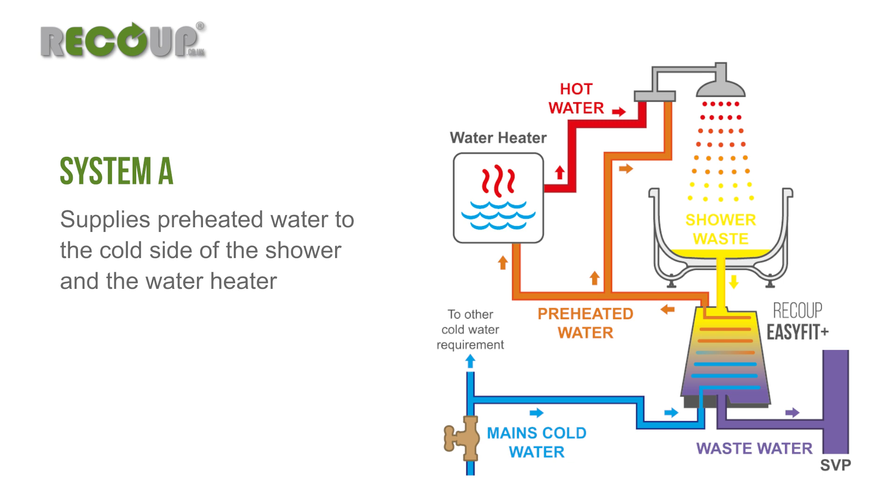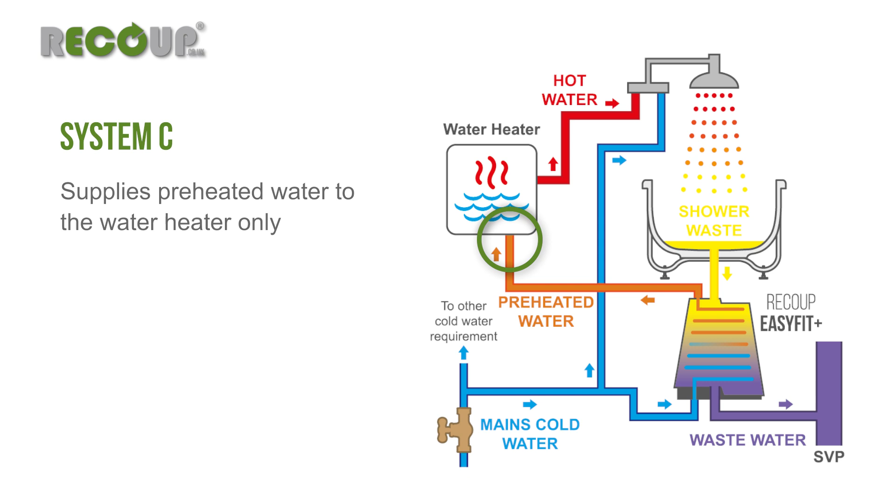System A supplies preheated water to the shower cold feed and the water heater. System B supplies preheated water to the shower cold feed only, and System C supplies preheated water to the water heater only. Refer to the installation methods for more information about the requirements of each layout.

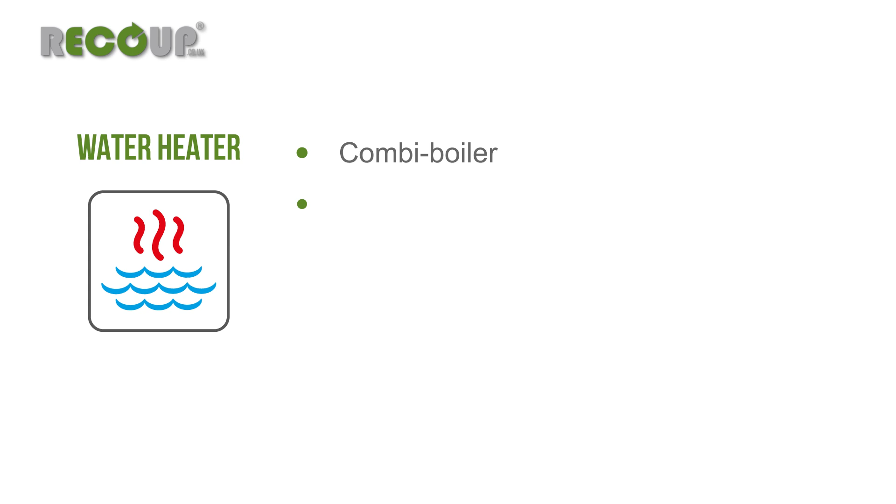The water heater can be a combination boiler, unvented cylinder with any heat source including heat pumps, a thermal store or heat interface unit. System A layout is the most efficient. However, with a retrofit installation, it can be difficult to get preheated water to the water heater, so System B is often adopted.

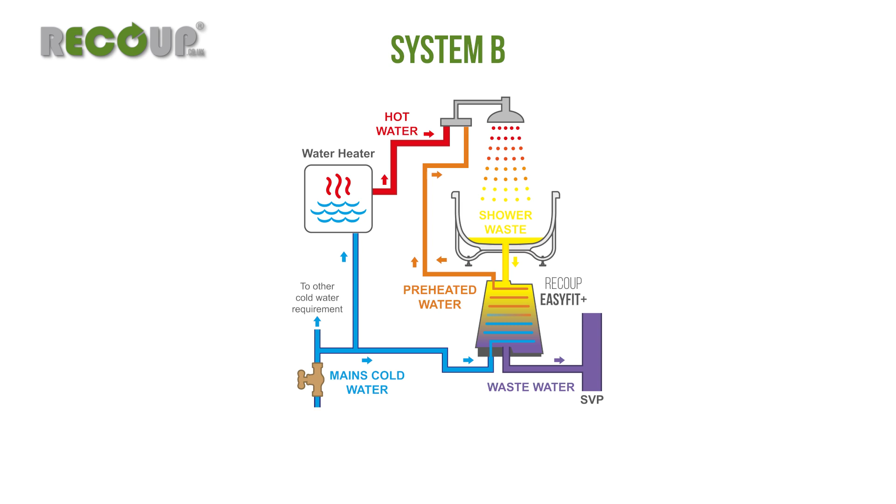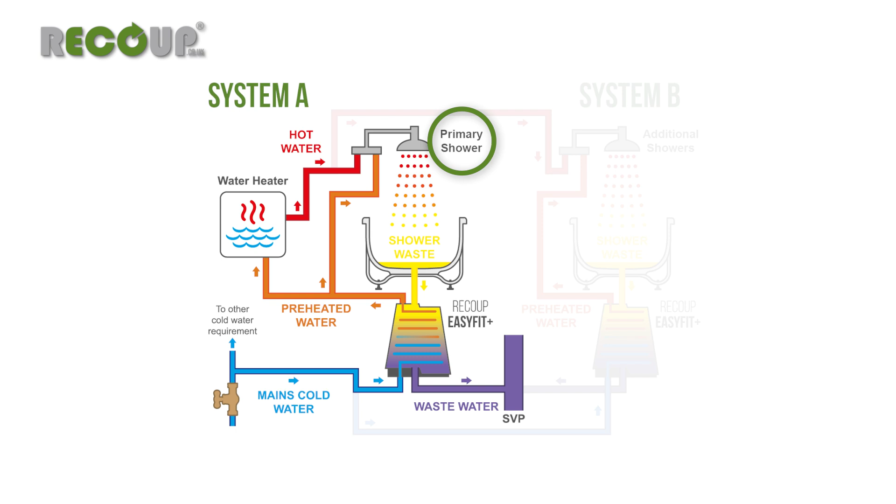Where multiple wastewater heat recovery systems are to be installed within a property, only one can be connected as System A or C, which would ideally be to the primary shower, with additional wastewater heat recovery systems installed as System B.

In this video, we will focus on a new build System A installation with a thermostatic mixer shower over a bath and a thermostatic mixer valve before the bath pillar tap. There are other arrangements for showering, which will be addressed near the end of the video.

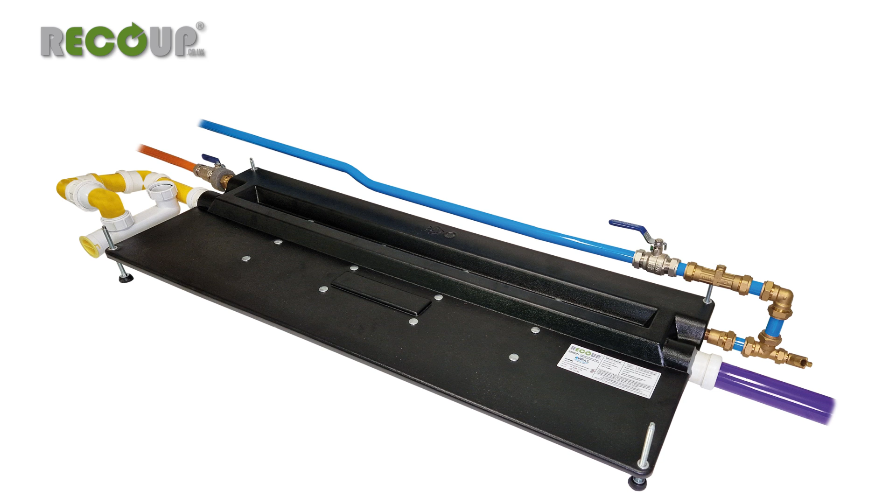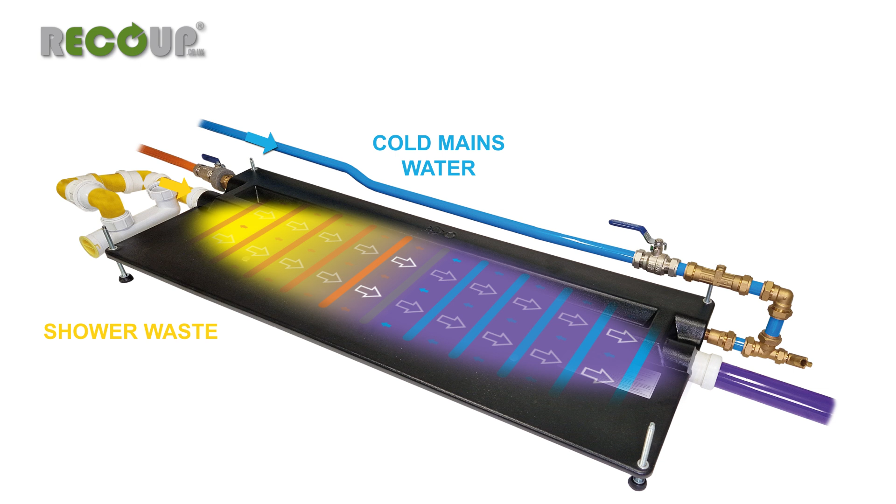When the shower is running, the warm shower wastewater enters the Easyfit Plus at the higher waste connection. Cold mains water will also be entering at the lower water connection to flow in the opposite direction. The Easyfit Plus efficiently transfers the heat from the wastewater to the incoming cold mains water, creating preheated water.

The cooled wastewater exits the Easyfit Plus at the lower waste connection to run to the main drainage system. The preheated mains water connects to the cold feed of the thermostatic mixer shower and/or the water heater depending on the system layout.

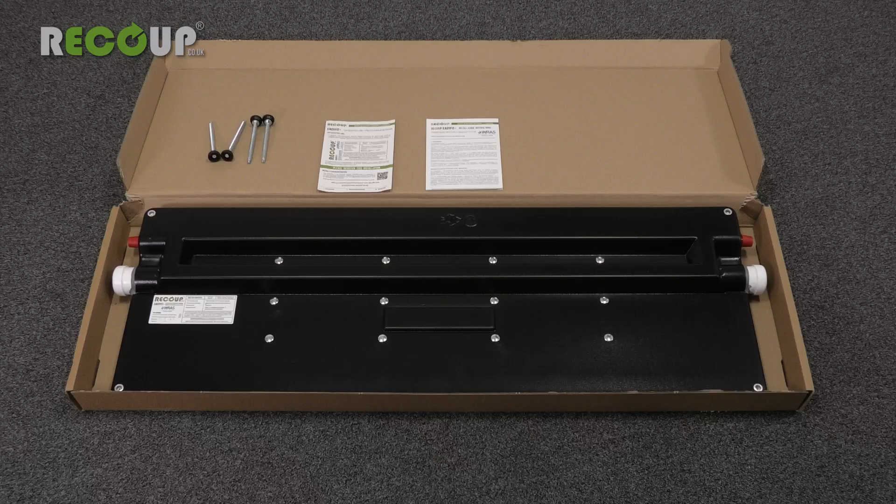The Easyfit Plus is supplied with adjustable feet, installation manual and a SAP identifier label. Check the condition of the main unit, and if damage has occurred during transport, do not fit the unit and return it to the merchant for replacement.

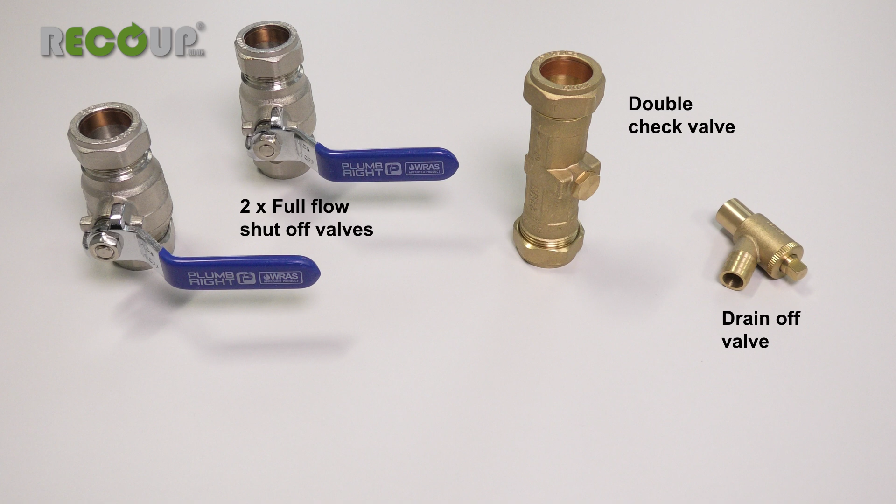To complete the installation, you will need some additional components that are not supplied within the box: 2 full flow shut-off valves, a double check valve, a drain-off valve, and 2 half-inch female iron BSP threaded connectors. If you plan to run 22mm diameter pipework to and from the unit, then consider using 22mm valves and half-inch female iron to 22mm compression adapters to maintain the larger pipe diameter.

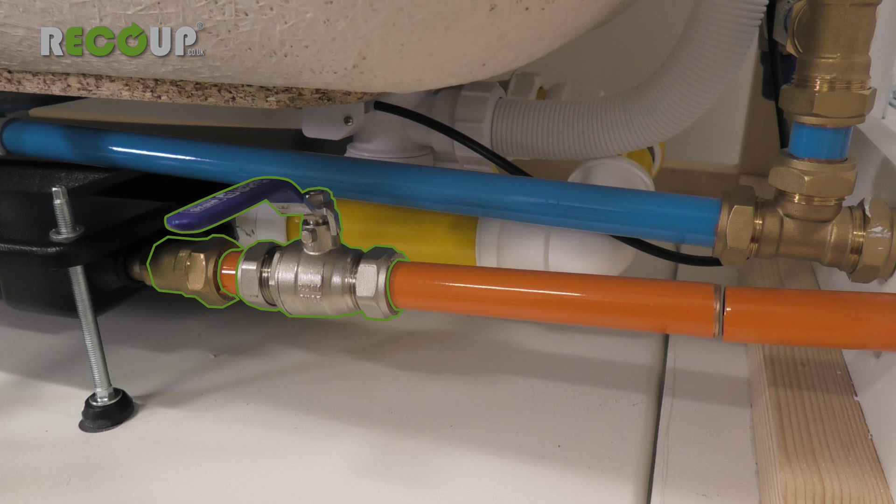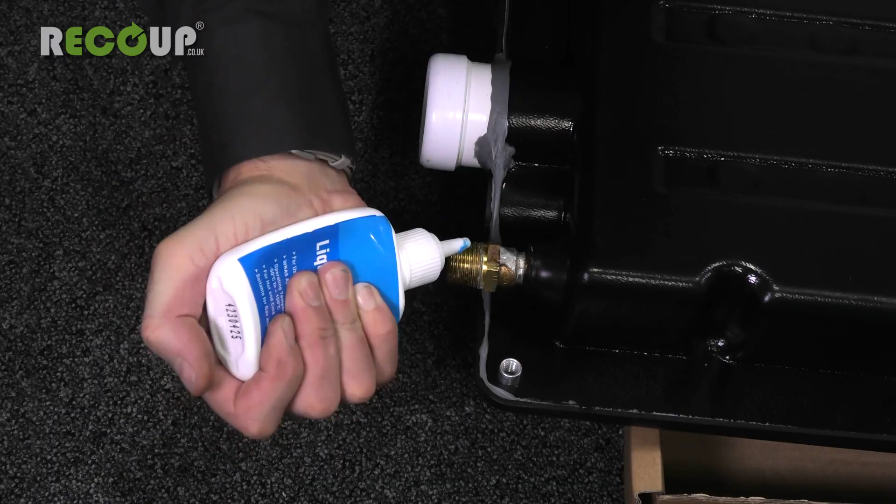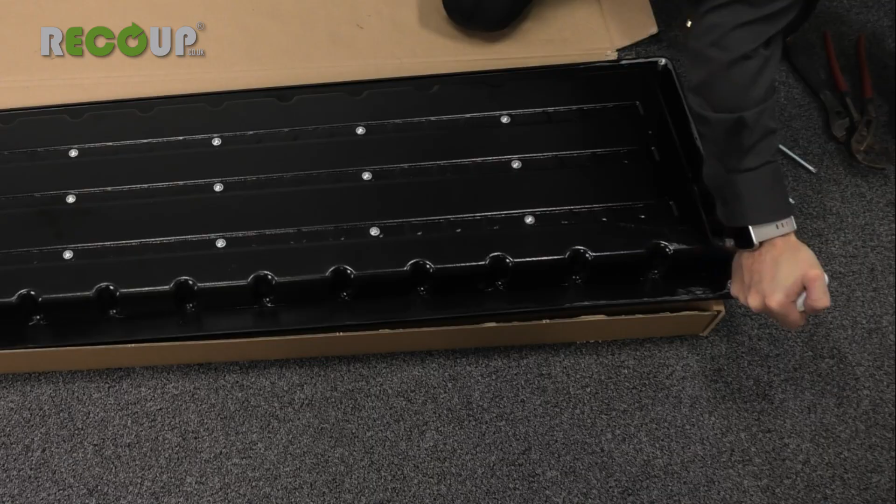The cold mains inlet and the preheated outlet are both half-inch male BSP parallel threads. Connect suitable half-inch female BSP parallel threaded connectors. Care should be taken to properly support the connections of the Easyfit Plus when installing and tightening the adapters to prevent damage to the brass connector and copper heat exchanger. A suitable WRAS-approved thread sealant should be used, with a liquid sealant highly recommended.

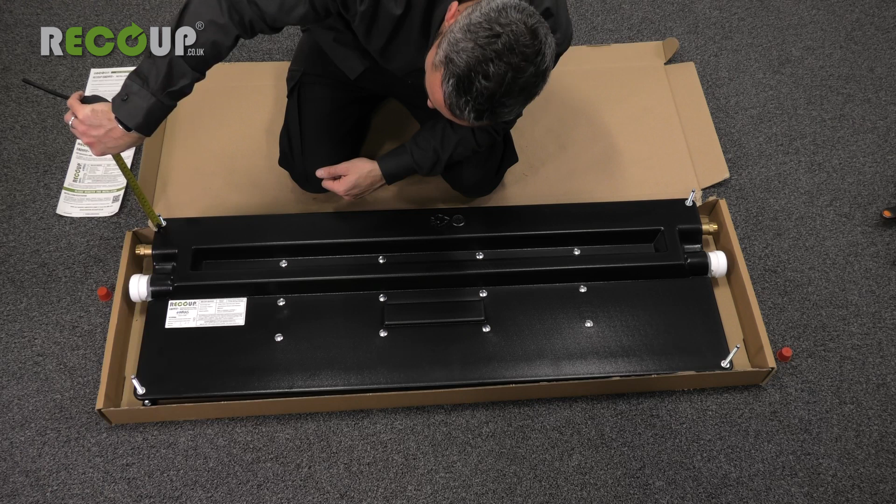Install the adjustable feet to the threads in the corners of the Easyfit Plus to achieve between a 30 and 40mm height difference across the length. Across the width, the unit must be level to achieve maximum heat exchanger contact when the shower is in operation.

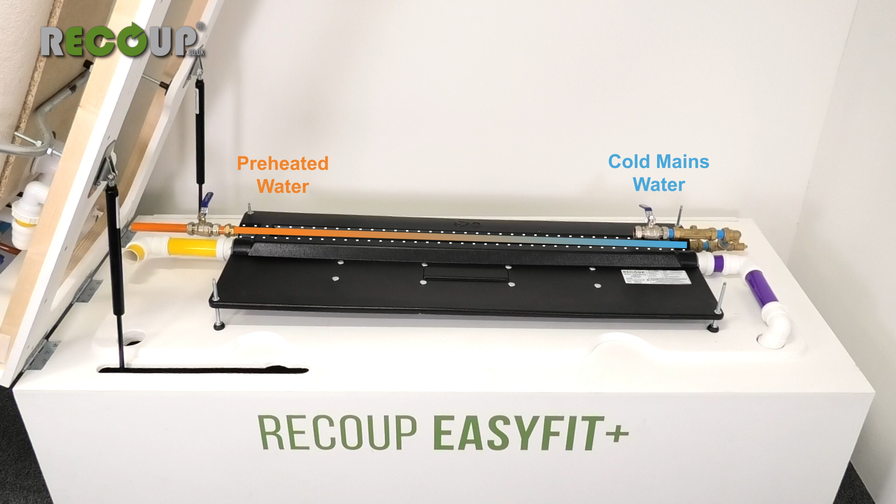The Easyfit Plus can be installed either way round, and the fall across the length can be set either way to suit the position of the soil waste pipework. The fall direction will determine which of the half-inch connections will be the cold mains water in and the preheated water out, as the flow of cold mains water must be in the opposite direction to the wastewater flow. The contraflow of water increases the heat exchanger efficiency.

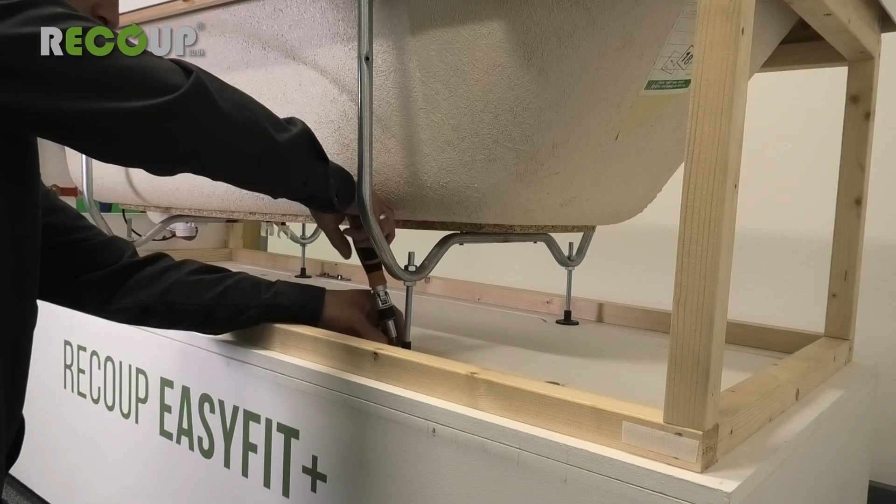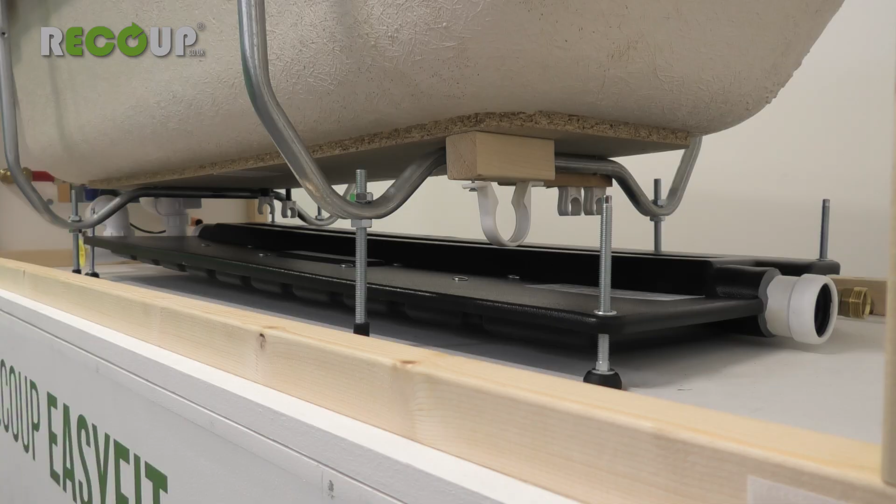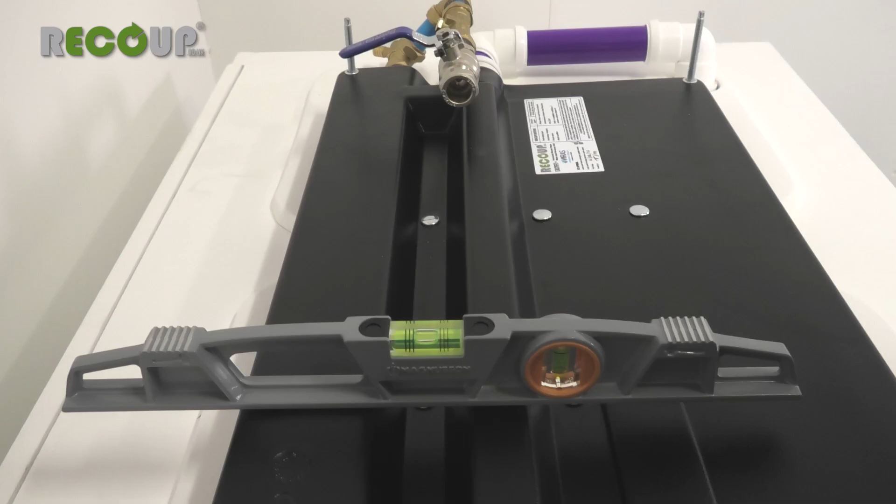With the feet adjusted and the adapters in place, the Easyfit Plus can be put into position. The dimensions of the Easyfit Plus allow for installation under most baths and suitably sized shower trays. However, it is worth checking the dimensions between the bath legs or shower tray legs and the waste position before installation, and if the centre leg is present, it will need to be removed and adequate support put in place that bridges the Easyfit Plus. Once in position, check the unit is level across the width.

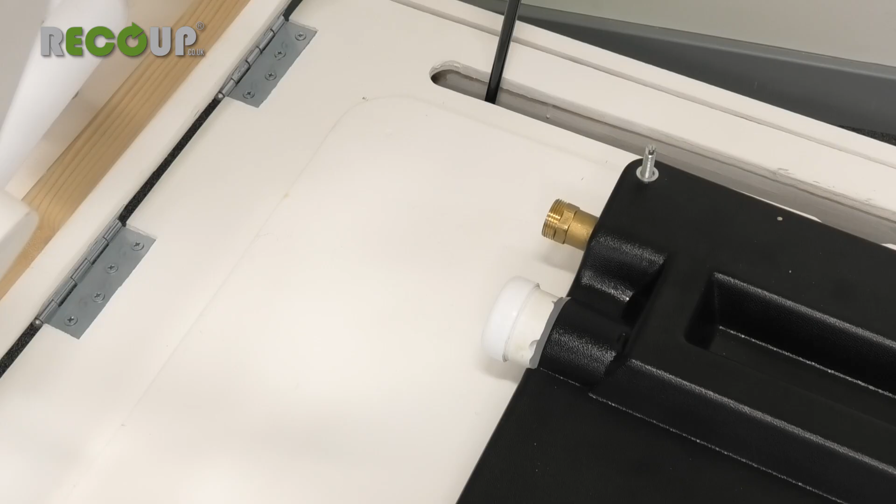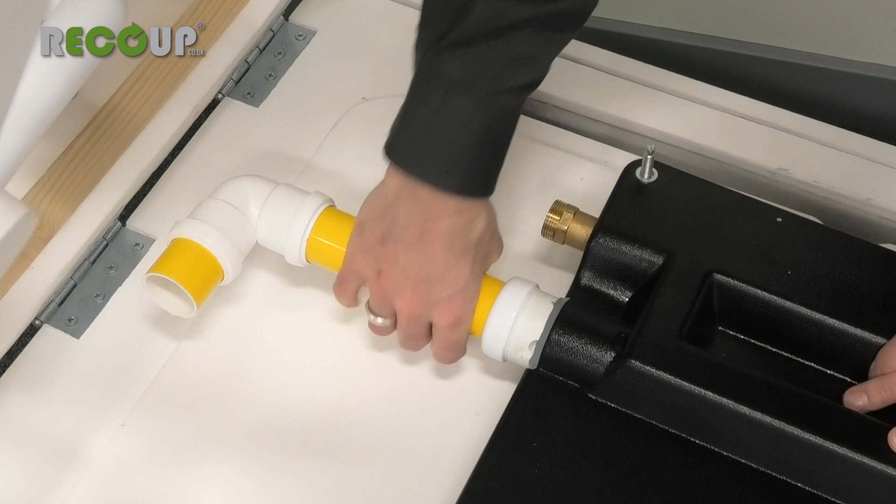When in its final position, the waste, inlet and outlet connections can be made. The waste connections of the Easyfit Plus are push-fit type and will accept either 40mm push-fit or 43mm solvent weld waste pipework. The full gradient of the inlet and outlet waste pipework must conform to Building Regulations Document H, be adequately supported and non-restrictive in design.

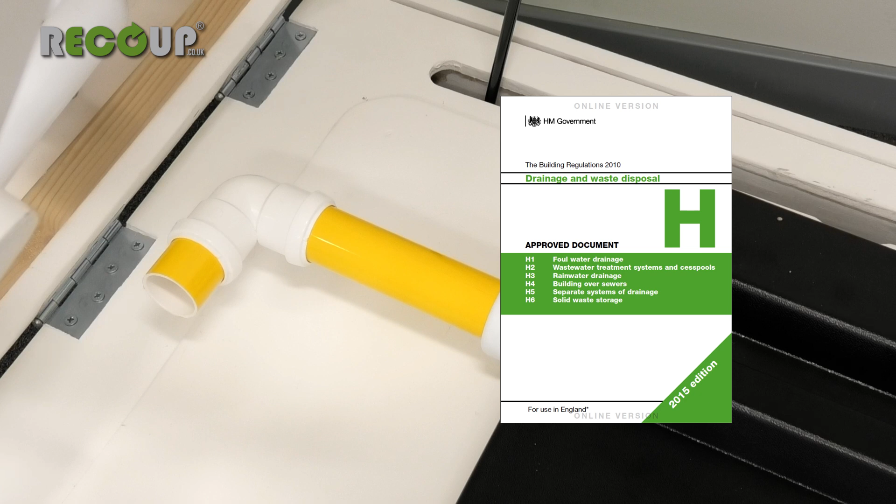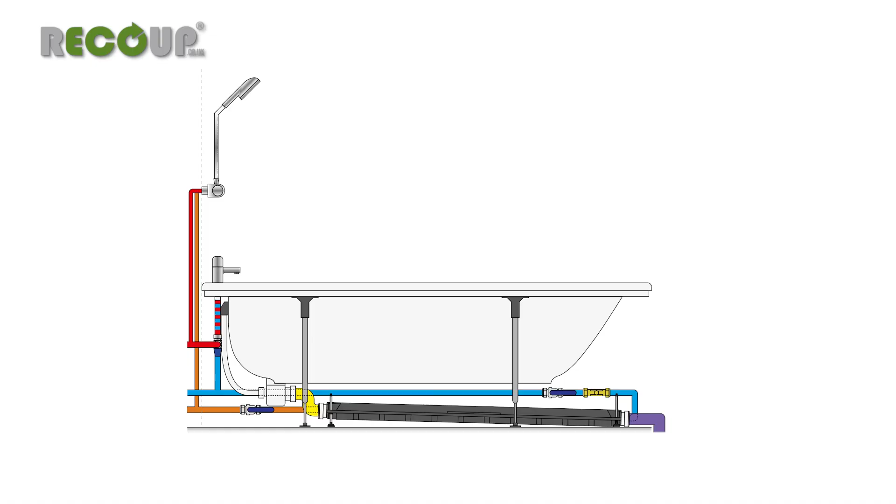Chamfer the end of the pipe, lubricate the O-rings and insert a maximum of 50mm of pipe into the connections. When first fixing the waste pipework, bear in mind the total fall required through the Easyfit Plus and the pipework. Setting the pipework at floor level or coming up through the floor can help to achieve adequate fall.

Connect the mains cold water to the lower of the two 1/2-inch connections. The cold mains water pipework must be installed with a full bore shutoff valve, double check valve and a drain off valve. These are not supplied with the Easyfit Plus but must be installed for backflow prevention and to facilitate isolation and draining of the unit.

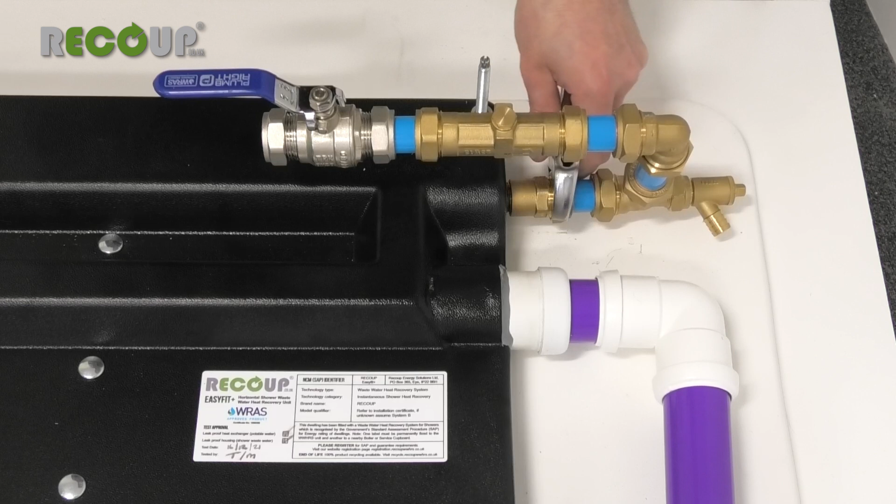If using compression fittings, make sure to support the fittings when tightening and that the weight of the installation pipework is supported to ensure the threaded connections into the Easyfit Plus are not strained. If using soldered fittings, do not heat any pipework connected to the Easyfit Plus.

Connect the preheated water pipework to the higher of the two 1/2-inch connections. The preheated pipework must be installed with a full bore shutoff valve, also not supplied, fitted close to the outlet connection. As with the cold mains water pipework, support fittings and do not solder pipework connected to the Easyfit Plus.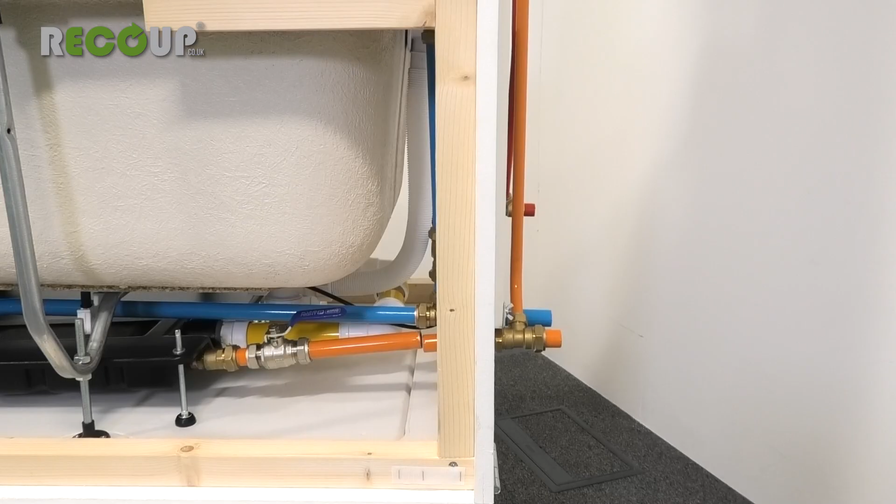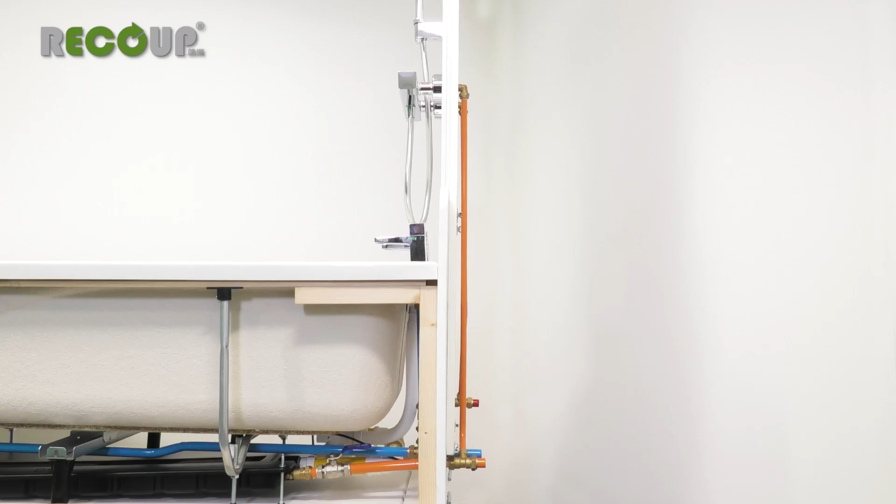Connect the preheated water pipework to the thermostatic mixer shower cold inlet and/or the water heater depending on the system layout chosen. Do not connect preheated water to a thermostatic mixer valve located under the bath on the hot tap supply. Best practice suggests the use of copper pipework for preheated water.

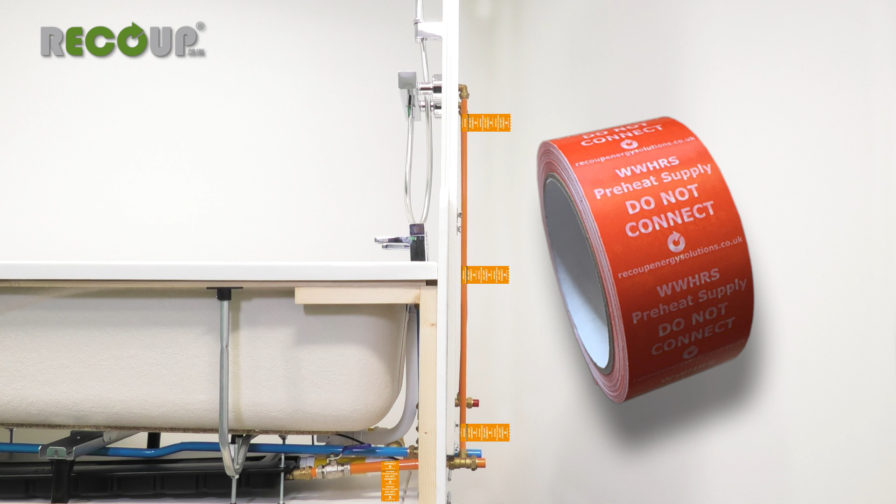If installing as system A or B, the linear length of pipework between the wastewater heat recovery system and the thermostatic mixer shower cold inlet should be no more than 4.75 metres in 15mm diameter pipe. All preheated water pipework must be labelled as preheated water to prevent future cross-connection of services. Recoup preheat supply tape is available for this. Do not insulate the Easyfit Plus unit itself.

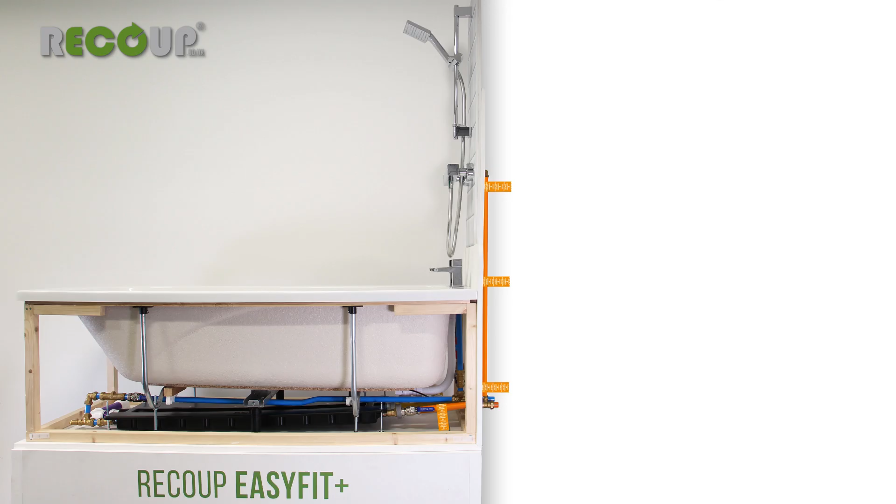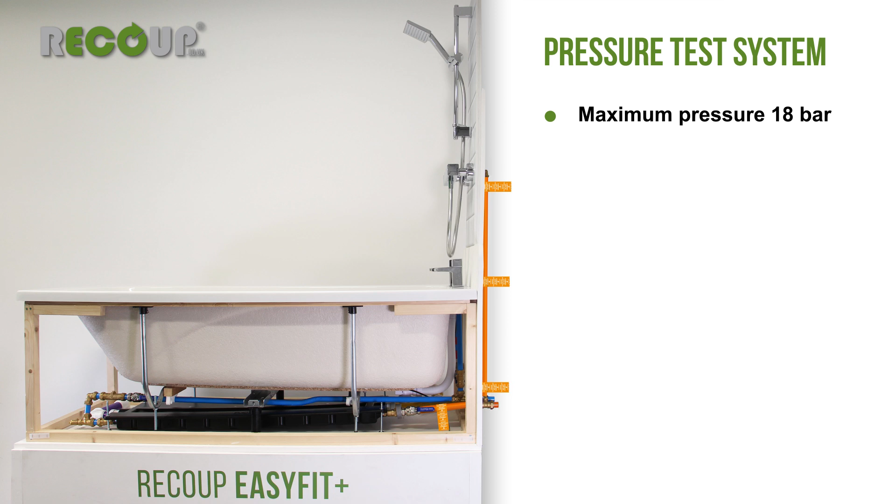The Easyfit Plus and installation pipework should be pressure tested before being concealed. The maximum test pressure of the Easyfit Plus is 18 bar. If the system pipework requires testing above this, then the Easyfit Plus must be isolated using the inlet and outlet full bore isolation valves before further increasing the system pressure.

Make sure that you release the increased pressure from the pipework before turning the valves back on again. Once fully tested, water can be introduced and the air purged from the wastewater heat recovery system.

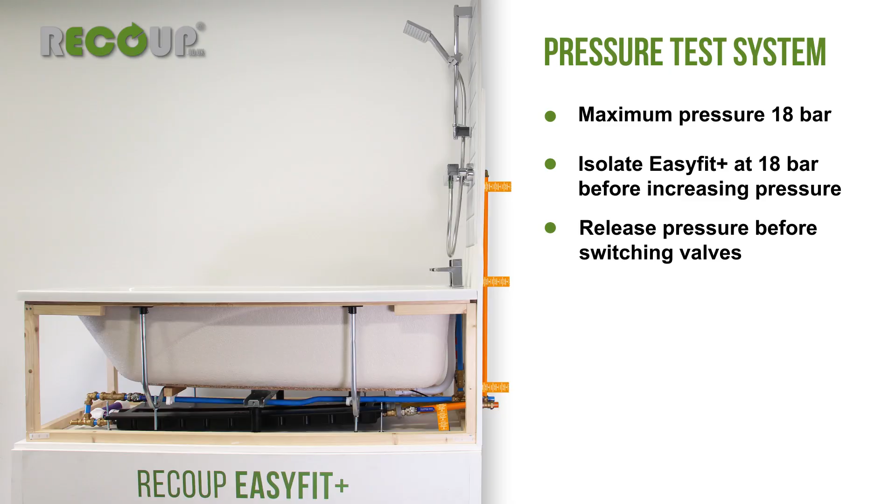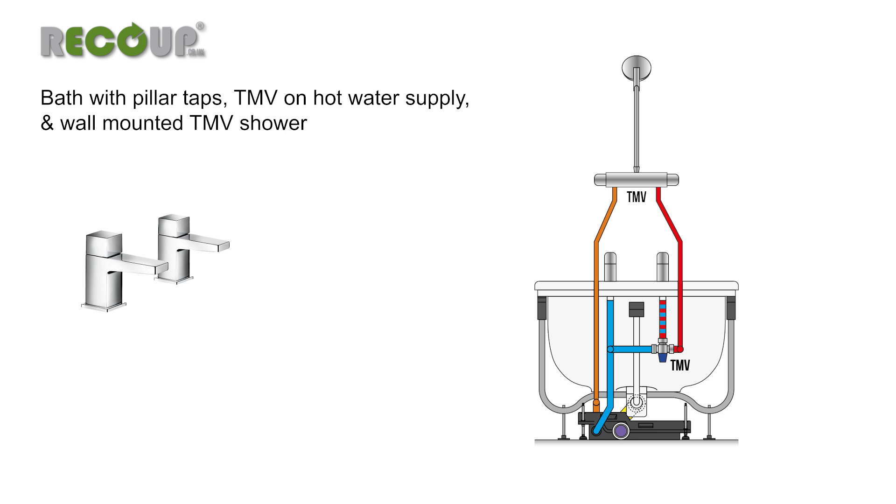So far in the video, we have looked at the most common arrangement of a bath with pillar taps, thermostatic mixer valve on the hot tap supply, and a wall-mounted thermostatic mixer shower over. With this arrangement, the thermostatic mixer valve supplying the bath hot tap is kept separate from the wastewater heat recovery system, which feeds the shower and/or the water heater, depending on the system type.

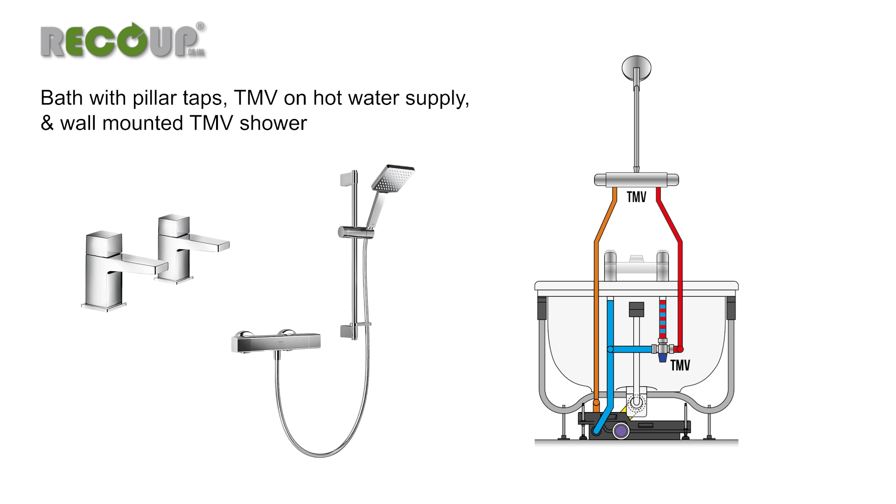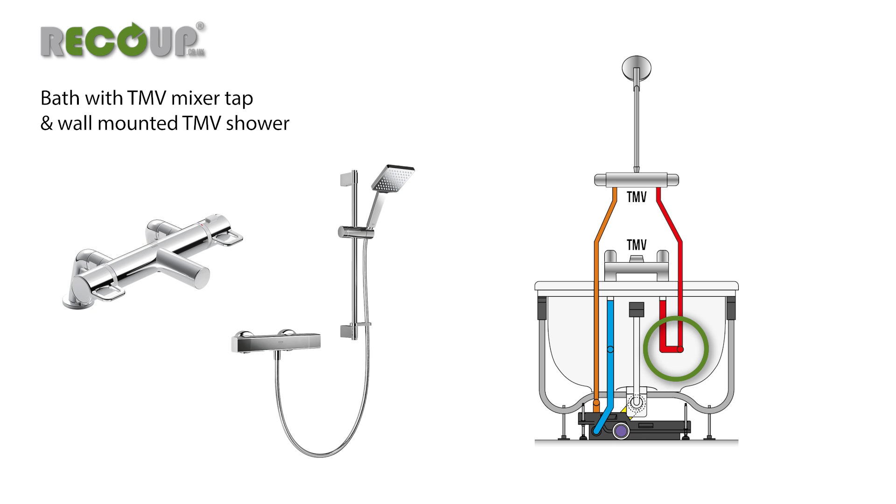When using a bath mixer tap with a thermostatic mixer valve on the hot supply and a wall-mounted thermostatic mixer shower over, the pipework arrangement stays the same. When a bath mixer tap has a built-in thermostatic mixer valve, there is no need for a separate thermostatic mixer valve on the hot supply. The preheated water still only supplies the thermostatic mixer shower and/or the water heater.

A bath shower mixer with built-in thermostatic mixer valve can be used and will save the need for a separate wall-mounted thermostatic mixer shower. In this case, a separate thermostatic mixer valve under the bath is not required, and the preheated water supply can feed directly to the thermostatic bath shower mixer, and if required by system type, the water heater. With this arrangement, the flow rate through the bath shower mixer must be restricted to 20 litres per minute.

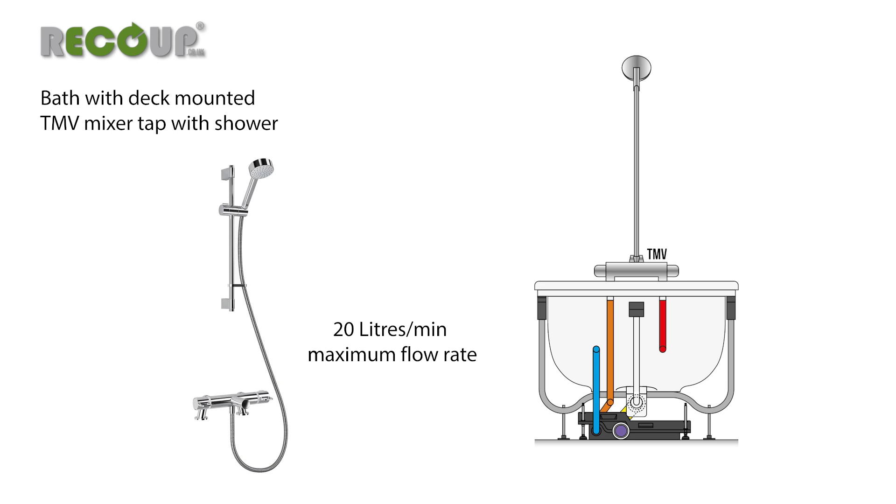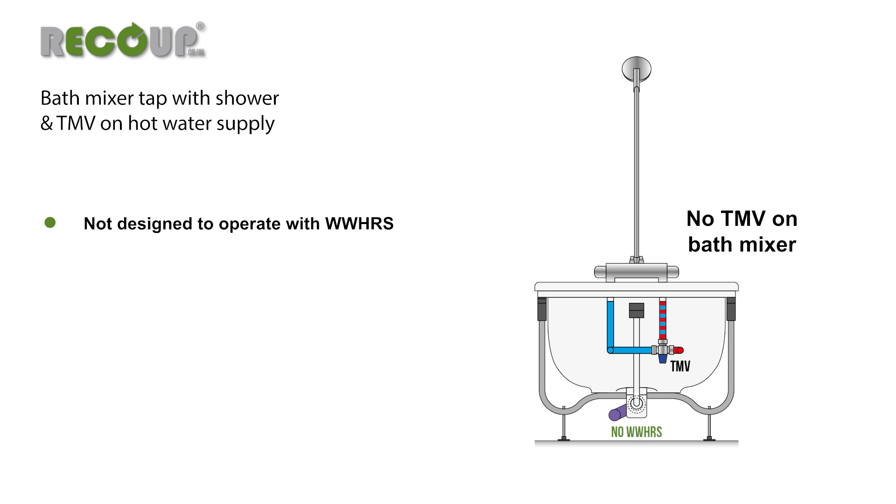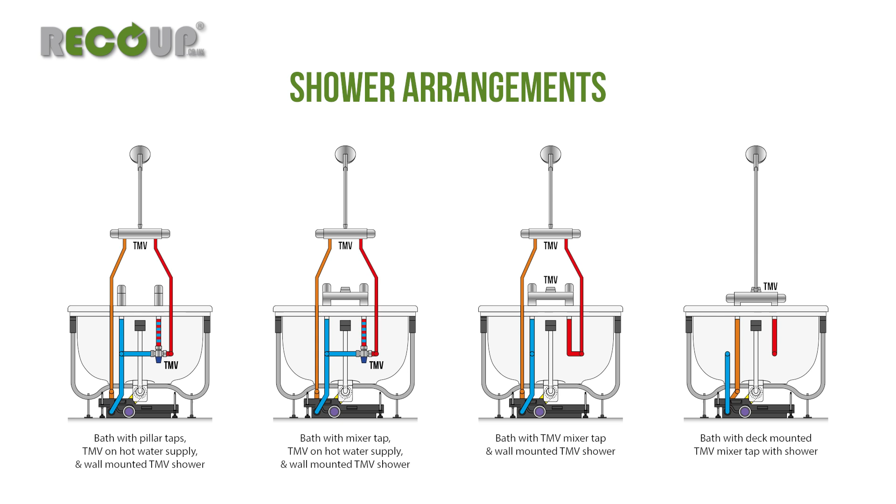An installation with a non-thermostatic bath shower mixer with thermostatic mixer valve on the hot supply is not designed to operate with wastewater heat recovery systems and will not comply with the requirements of SAP. One of the previous arrangements should be used. In all cases, the shower receives full temperature hot water from the water heater, and where a thermostatic mixer valve is present under the bath, it will not receive preheated water.

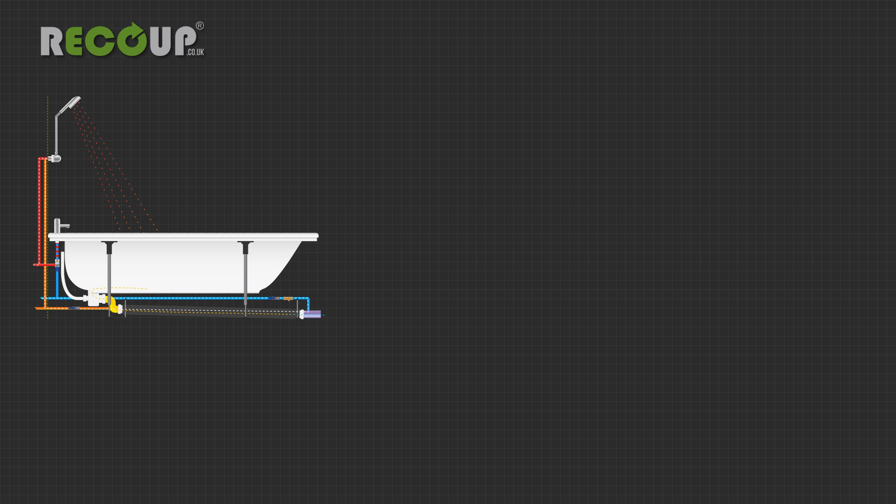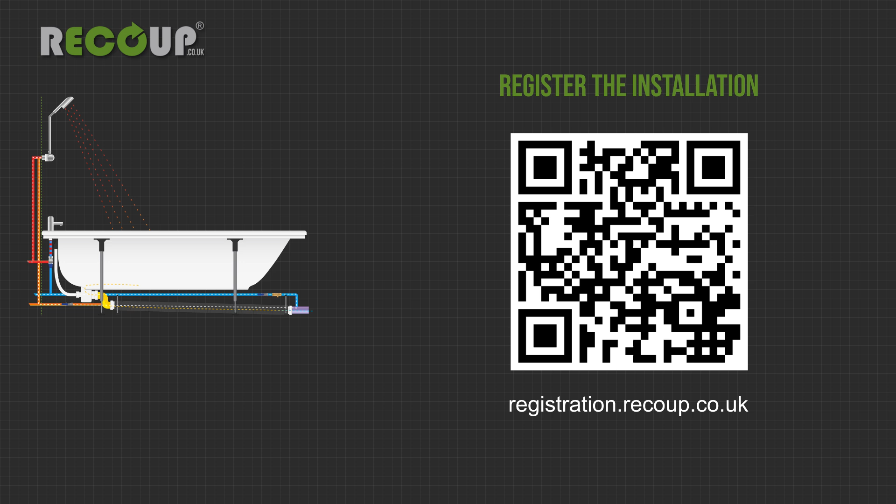Ensure the SAP identifier label supplied with the Easyfit Plus is completed and fixed onto or near the water heater supplying the hot water to the shower, and that the installation is registered on our website. With every system type and every unit type, the following key points must be observed. Follow the specified system configuration of A, B or C. Failure to do so could mean the installation does not meet the requirements of SAP calculations.

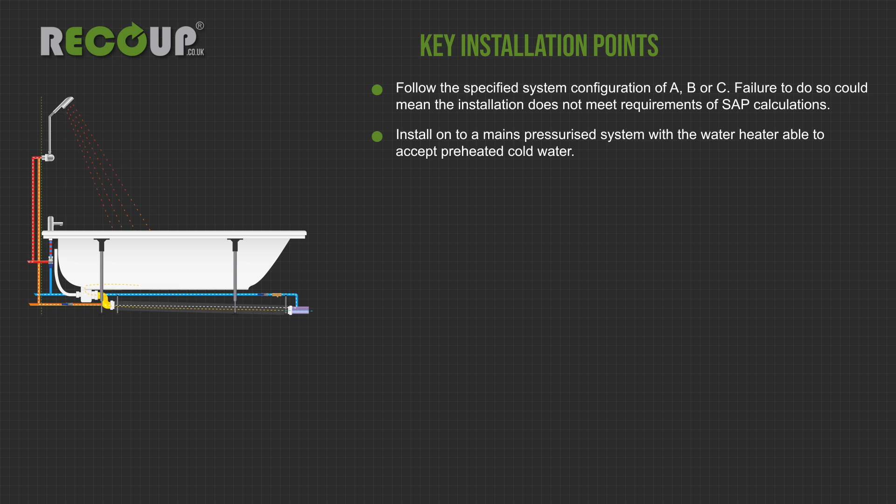Install onto a mains pressurised system with the water heater able to accept preheated cold water. Connected showers must be thermostatic mixer showers with balanced pressure supplies. Preheated water pipework must be labelled for its entire length and be no longer than 4.75 metres between the wastewater heat recovery system and the shower. Do not insulate the wastewater heat recovery system itself.

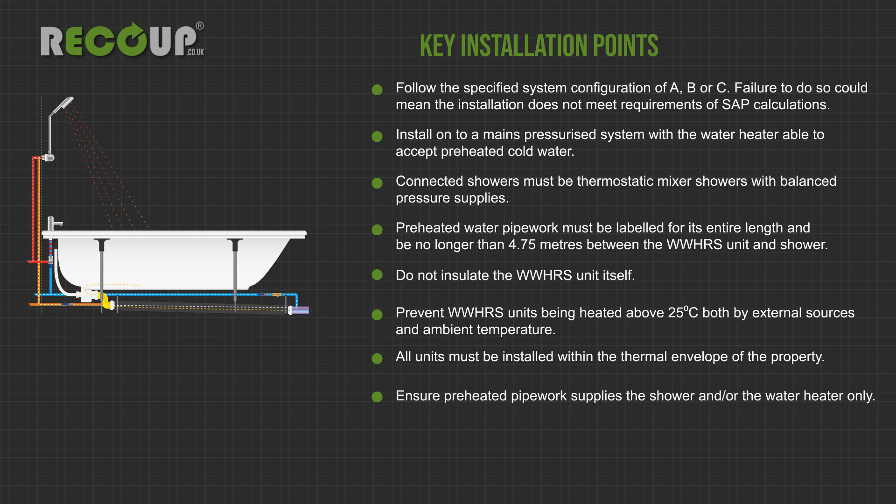Prevent wastewater heat recovery systems being heated above 25 degrees Celsius, both by external sources and ambient temperature. All units must be installed within the thermal envelope of the property. Ensure that preheated pipework supplies the shower and/or the water heater only. Ensure the SAP label is applied onto or near the water heater and that the installation is registered on our website.